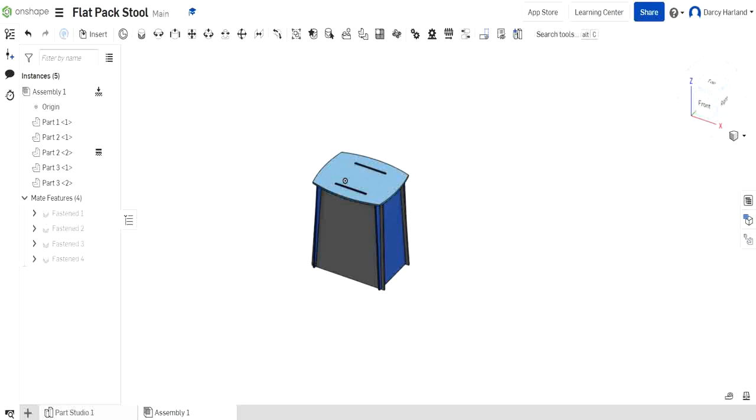In this video we're going to show you how to do a drawing of the stool. So in order to do a drawing we need to go down to the bottom of the screen here where there's a little plus symbol. Click on that plus symbol and then we're going to create a drawing.

Now you might get a slightly different window that pops up on yours. Essentially we want to do a drawing with no views on it, so we get to decide what views of the parts we have. But we do need to have it in millimeters. That's mm in the document here. So whatever these letters are at the start, make sure that it's mm. You can do inches, so INCH. You don't want that one. You just want mm.dwt and hit OK.

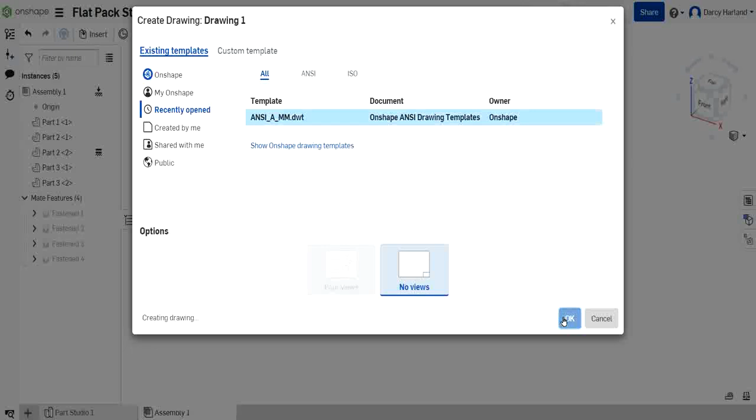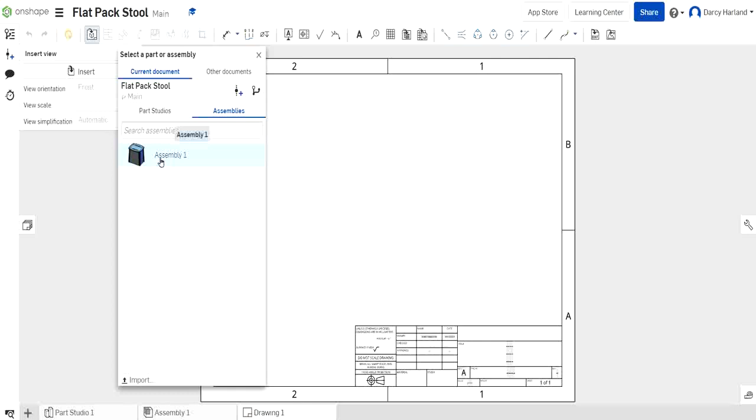Now this will create a new little tab down the bottom here. You can see drawing 1 next to assembly 1. And at the moment we don't have anything on here. Now what I'm going to do first is actually add a picture of my assembly. So rather than go to Part Studios, I'm going to insert a picture of my assembly first. And assembly 1, I'm just going to put a picture of the assembled job in the corner here.

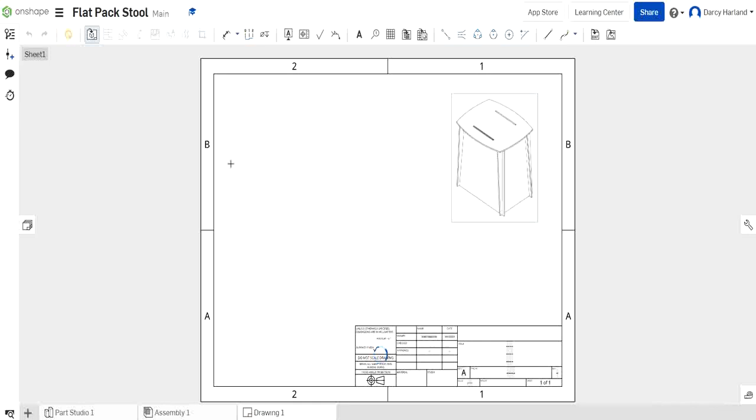Now it's actually giving me a front view. I actually want to have a 3D view first, so let's go isometric view. Change that view to isometric and let it load. There it is. That's a nice view of the top and side. I just click that down on the page. Excellent. So that's showing us our isometric view.

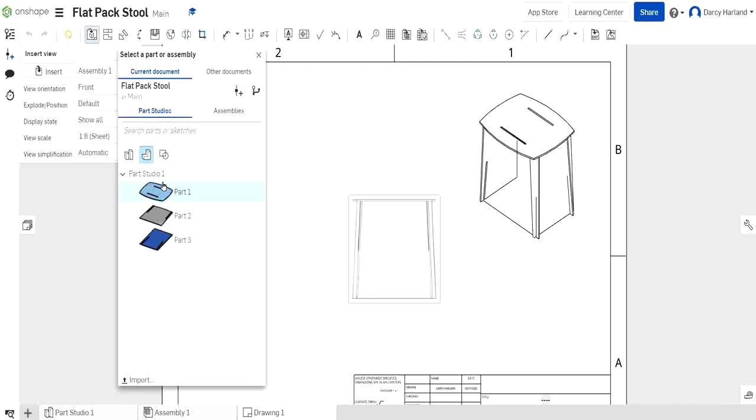Okay. Now we need to actually show pretty much the top view of all the other parts. So we're going to go back to insert a part here. We're going to go insert and let's go part 1. And we're going to change front view to top view.

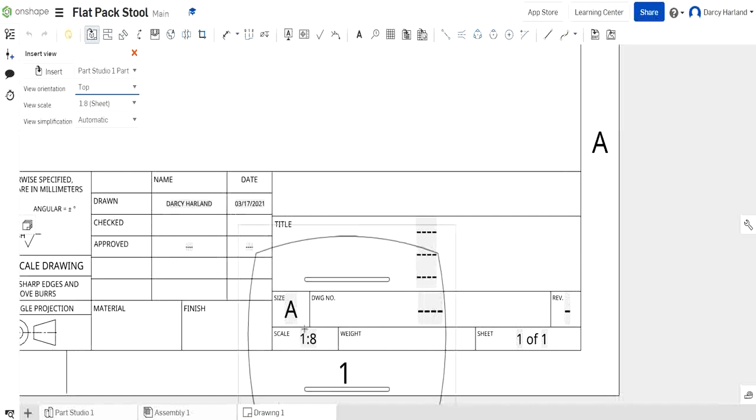Now you can also change the scale that you have it on. At the moment it's a 1:8 scale, which is the scale for everything on the sheet. That is actually written down here, scale on the bottom of the drawing as well. So the drawing should record that information as well. We're going to leave it at 1:8 because I think that fits better. But if you wanted to change that, it will add a little scale underneath it so that it will note that this one is different to the scale of the rest of the drawings. Let's go ahead and click that one down.

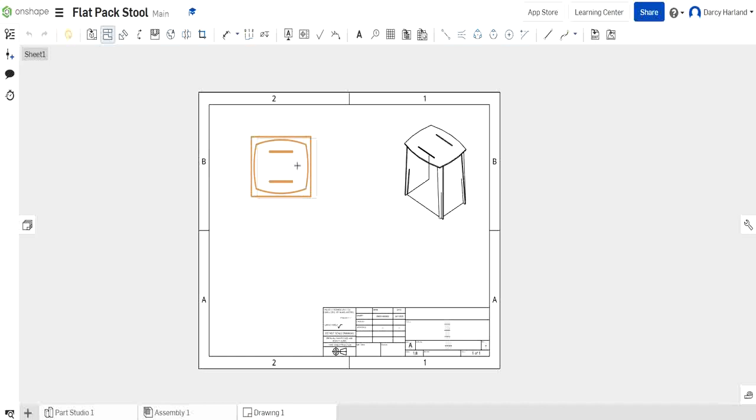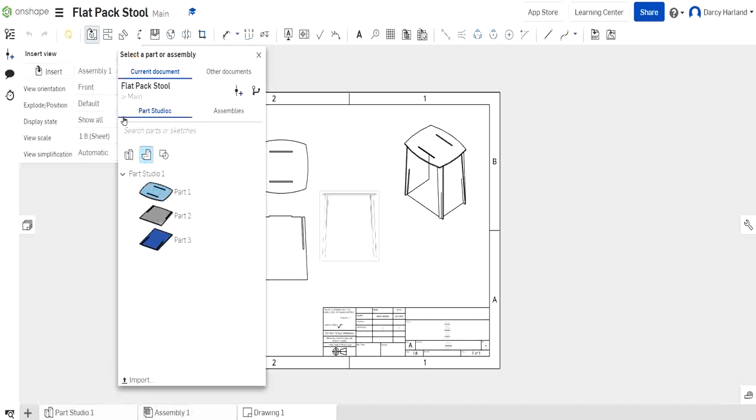Now I don't really want any other views of the pieces. I only really want the top view for this one. Side view is pretty much not going to show anything, it's just going to be a flat line. Let's go ahead and insert another part, part 2. Again, we want it to be a top view, looking down on it. I'm going to insert that one. Insert one more. Insert part 3 and a top view. Let's put part 3 over here. Okay, so there are all our parts. I'm just going to hit escape. There are all our parts.

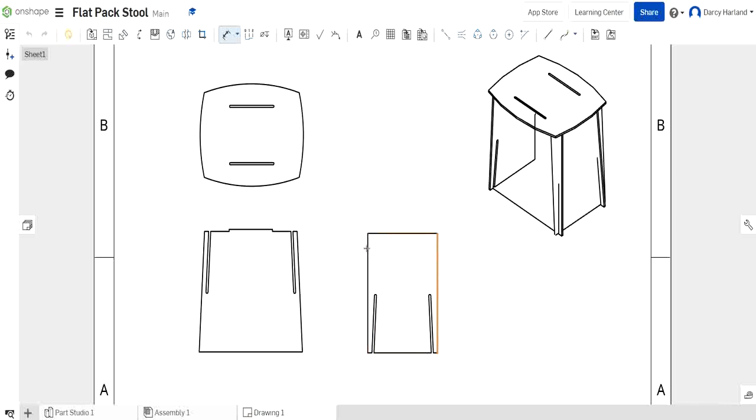Now what we want to do is have measurements of these. So we're going to use the dimension tool now. Let's go ahead and start with this one. It's nice and square so it's easy to follow. We want to know the length of this side, 390. We want to know the length of this side, 270. Let's say we want to know the length of this piece here. It should be 186, or it might actually be better to go to the top there, but I don't know if it's going to let us. We're going to have to go there.

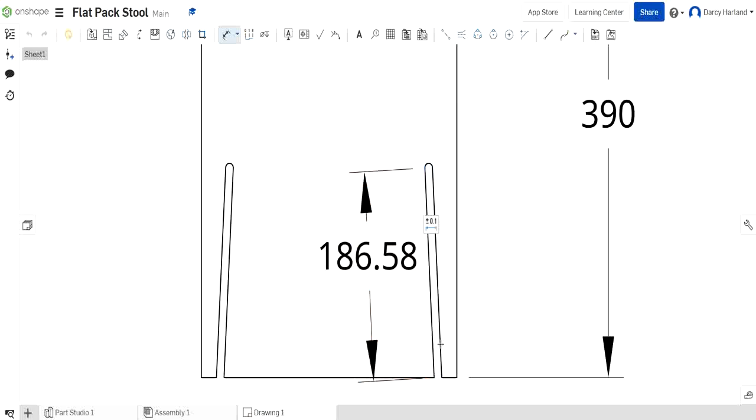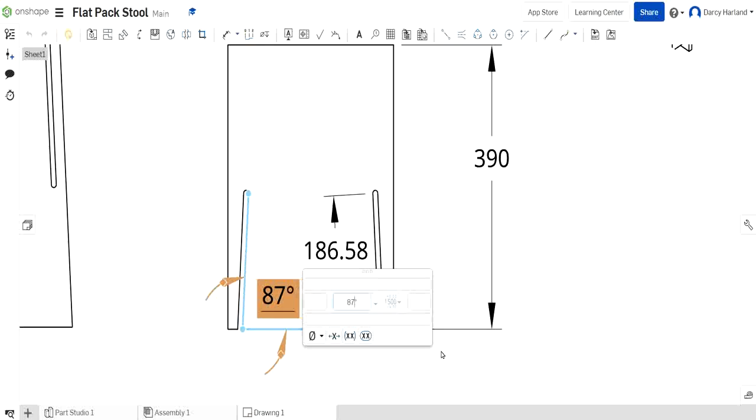Okay, and then I also might want to know the angle. So from here to here is 87 degrees. You know what? I'm not going to put it there. I'm going to put my dimension tool in this corner, just so that there's not too many bits of information all squashed together. Sometimes it can be a bit confusing. So 87 degrees there. I'm actually going to change that to be 87 degrees rather than 0.0, just 87. Okay, so we can do that there. 87 degrees. That's pretty much all we need for this one.

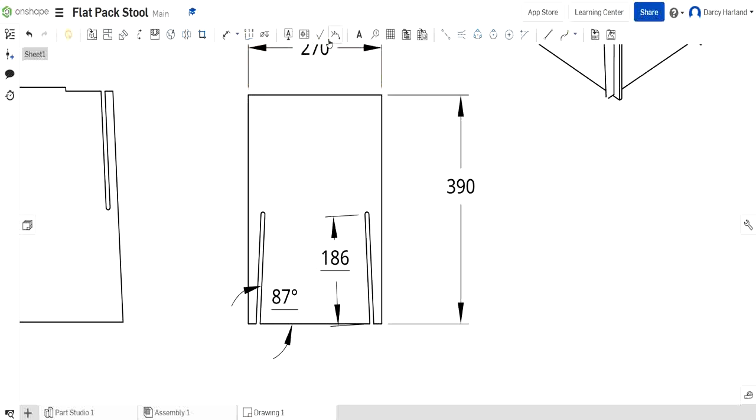You can go ahead and fix this one up as well. I think it was 186. No, sorry, I remember now. When I measured this edge, it was actually this edge, which is 187 exactly. So this one, because it's a little bit shorter, is just 186 point something, but the outside edge should be 187 exactly. So we can go ahead and delete that one. Let's just leave that one in there, like that.

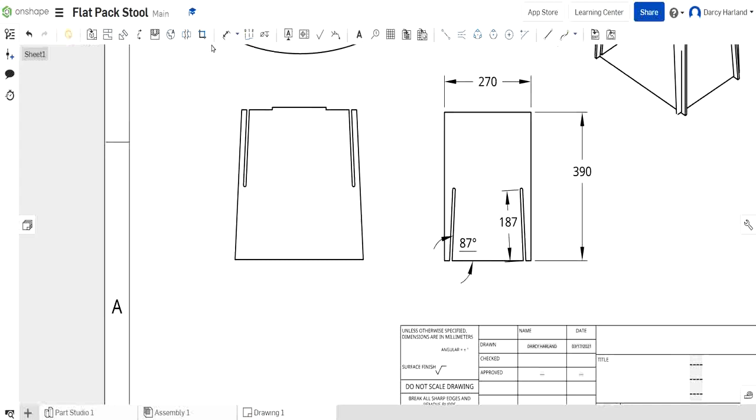Okay, let's go ahead and measure this one. So from here to here, 168. From this line to the top, 400. From the top to here, 6.5. Now we want this angle again, from here to here, 93 degrees.

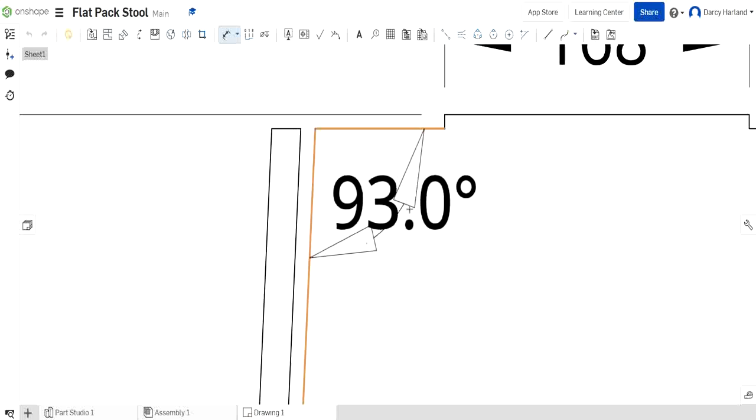Okay, I'm going to measure from here to here, 198. Again, I think it might be the outside edge, so let's just delete that one. From here to here. No, it isn't the outside edge, so it must be the inside edge. 1, 2, 198. Because it's 198.15, and it's because we're not going on that slight angle.

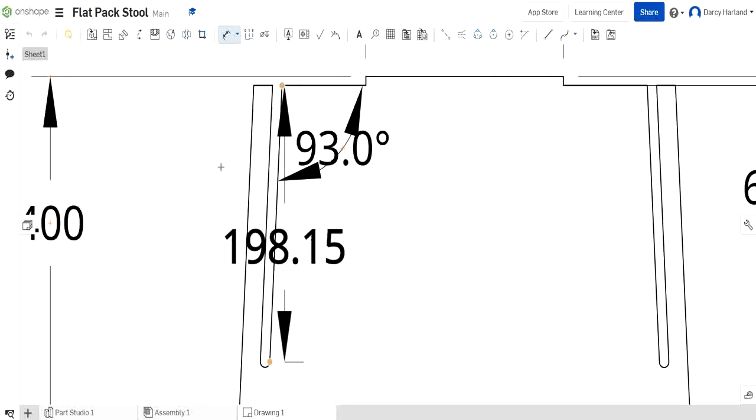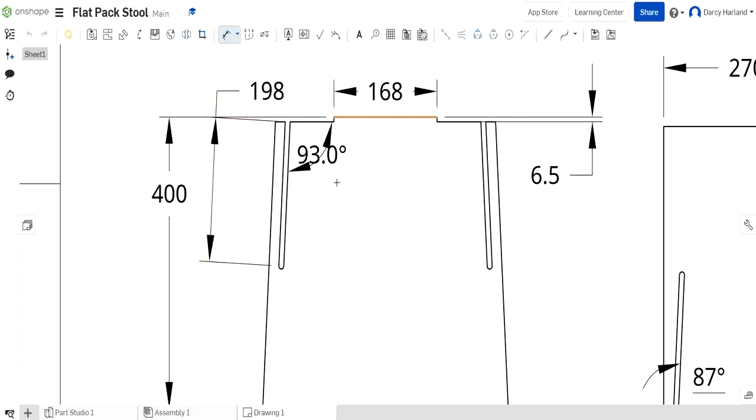If I actually move that up now, 198.42, it probably is actually the outside edge. If I go from there to there, and move up on that angle, there it is, 198 exactly. Okay, so it was just because of that slight 3-degree angle, I needed to move my mouse up a little bit, and it would give me that 198 exactly. There we go. Now that it's locked in, I can move it into that position, and it won't snap to that other size anymore.

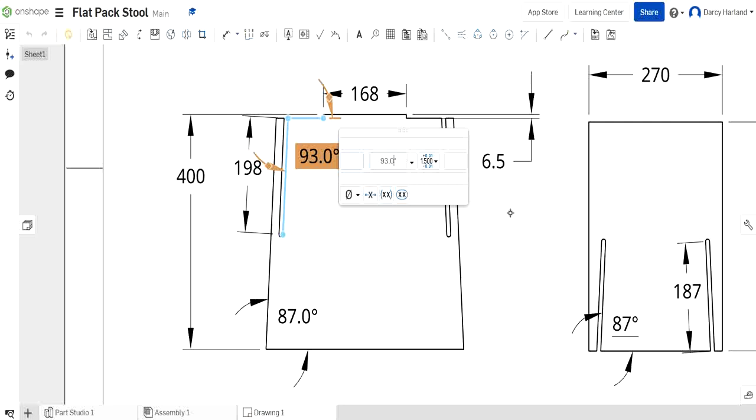Okay, I might even put the angle here, 87 degrees. Okay, this one again is a bit odd. Why do they give me the 0.0? I don't really need the 0.0, so that was just double clicking, and I can move that to where it needs to be. Okay, and I think that's all the measurements for that one.

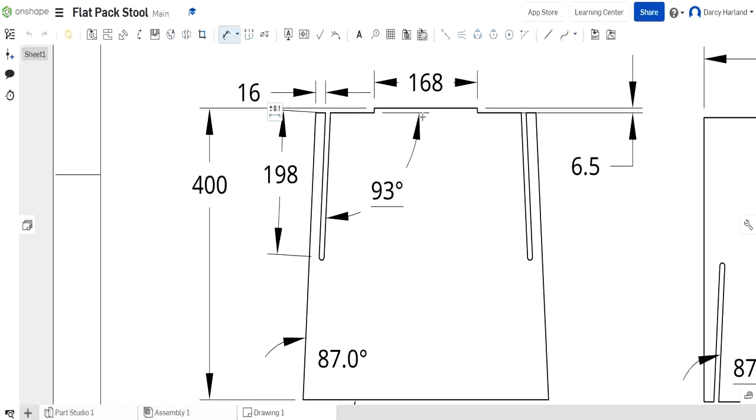What about this measurement? Let's measure that as well. So dimension tool from here to here, and that's 16. Okay, might do the same on this one as well. Let's measure from here to here. It's also 16. Okay. Alright, now for the top piece, I want to know the length of this. I want to know the width. I want to know from here to here.

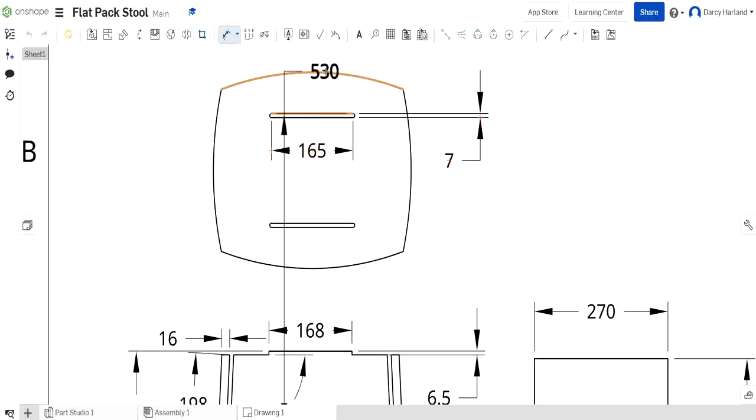Now, this one is actually giving me the radius of this corner. So what I need to do for this one, because these have actually got curves on them and they're not straight lines, I actually need to add a line in here. I'm going to draw a line out, and I'm going to make this line just anywhere, as long as it's a straight line there, sitting like that. I'm going to hit escape now so it stops drawing that line.

But it's pretty much just anywhere up here, and then I'm going to grab the middle of this line, and I'm going to drop it in until it snaps onto the edge of that arc there. You can see where it lights up that little triangle. I'm going to do the same on all 4 edges. So let me go ahead and do that very quickly now. These lines don't have to be any specific length. You can see in a minute we can delete them. Oops, I don't need the dimension tool, I need to grab it. Alright, there we go.

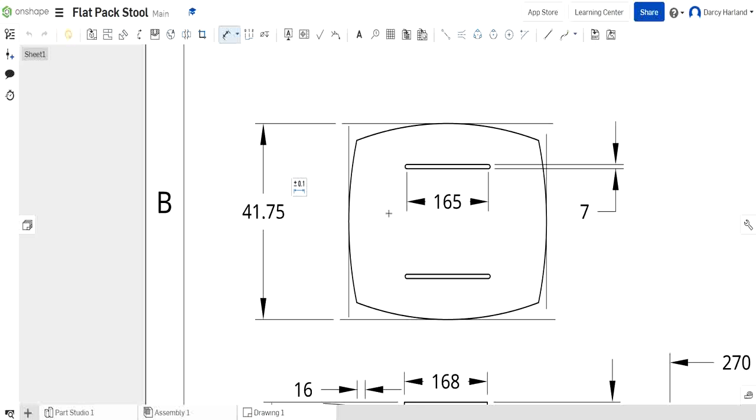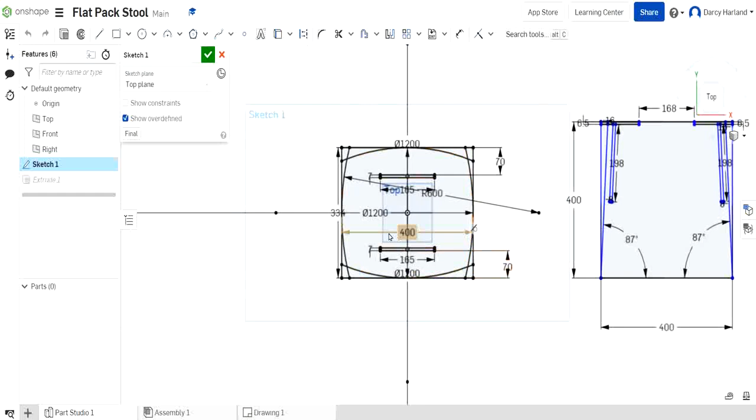Snap it on. Okay. So now what we'll do is we'll measure from this line to this line, and it's not 41.75. We're actually going to change this size. It should be 400. Sorry, it should be 334 is what it is. Okay, and we can check that by going back into our Part Studio, and you can check in your sketch. The sketch there should show 334. Okay, so we're just making our drawing the same. So back in our drawing now, 334 for that way.

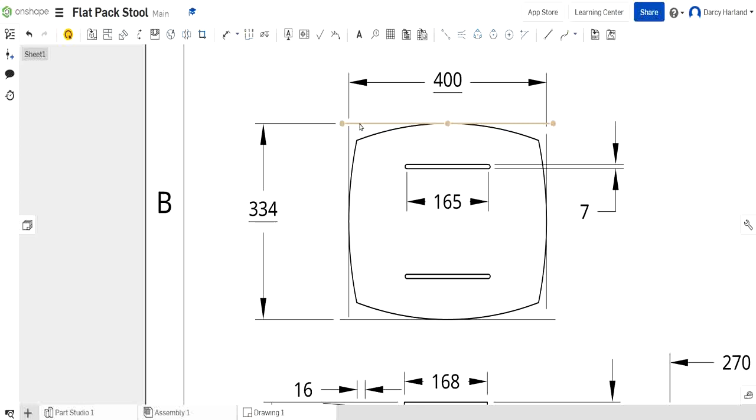We're going to measure from here to here, and that shouldn't be 50, it should be 400. Okay, so what I think it's actually measuring there is the distance on the page. From this line to this line, that's the distance on the page, 50 millimeters, right? So we don't want it to be 50 millimeters, we want it to be 400. So you just go in and change that size. Now what you can do is you can delete those lines.

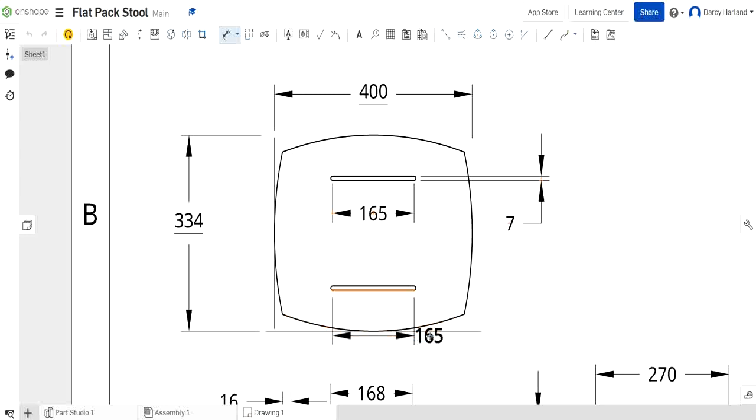Okay, well before I delete all the lines, I might just go ahead and put a measurement from this line to this edge. No, it's not going to let me do that. Let me go ahead and put another line. I'm going to put another line now in line with this one. And I'm going to snap it. Let's grab the corner of it, snap it onto there, make that one so it's straight. There we go. So now I've got these lines in line with that one, and I'm going to measure again.

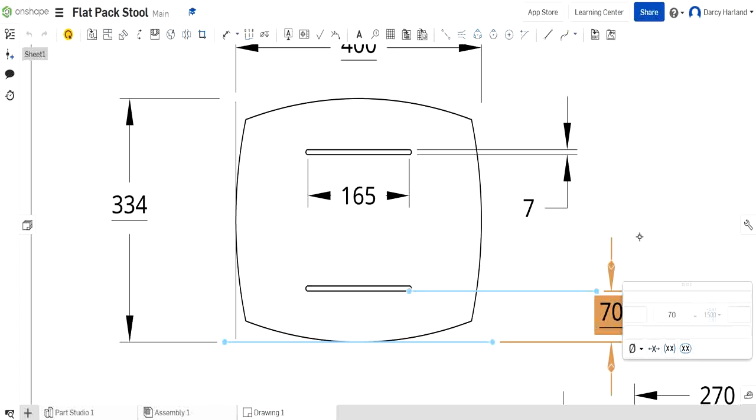This is not going to tell me the right measurement because it's the measurement on the page. So it's 0 degrees. I want it to be saying a measurement. Let's change that 0 degrees and let's make it 70. Okay. And I hit escape there. So that's giving me the measurement now. But after you've put the measurement on, you can delete the lines, which makes it really good. Whoa. Control Z there, deleted part of my drawing. Delete the lines there. Now you can see that measurement can just sit in there like that.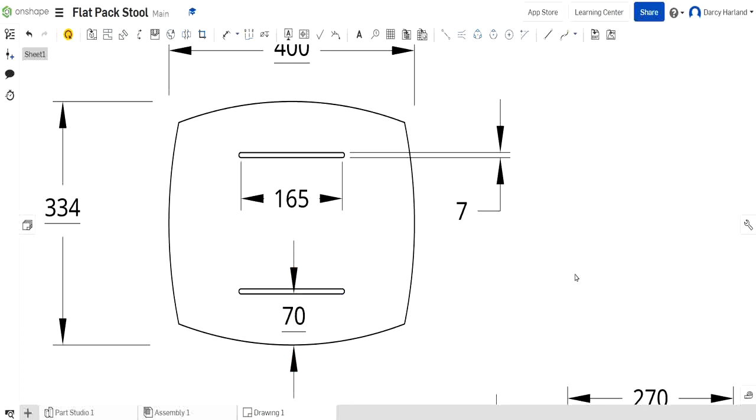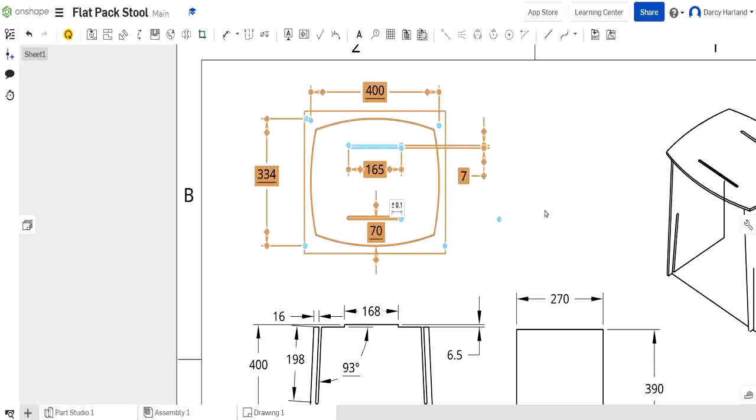Okay. You can see we've got the overall measurement from here to here, from here to here. We've got all our measurements. I can actually move that up. Whoops. Let's just move everything. Select everything, move it up. There we go. So we've got a bit of space between that one and the next one. And that is how we do a drawing.

So once you want to print this or save it as a PDF, you can go ahead and move any of these to where they want to go. The measurements should come with them, except for those ones that are a bit weird with that top piece. But you can go ahead and click these 3 lines, and then you can hit print, and that should take you to this screen where you can print or download it as a PDF. Okay, and that's pretty much how to do a drawing of the flat pack stool.